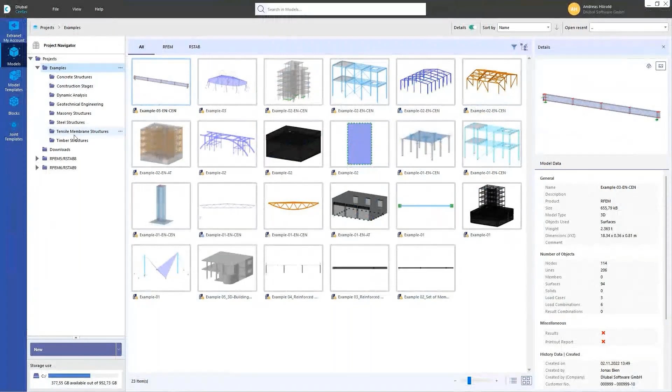That example you can find in the Dlubal Center under examples, then steel structures, and that's the example. I prepared that, I selected also the steel design. Okay, so let's do a steel design.

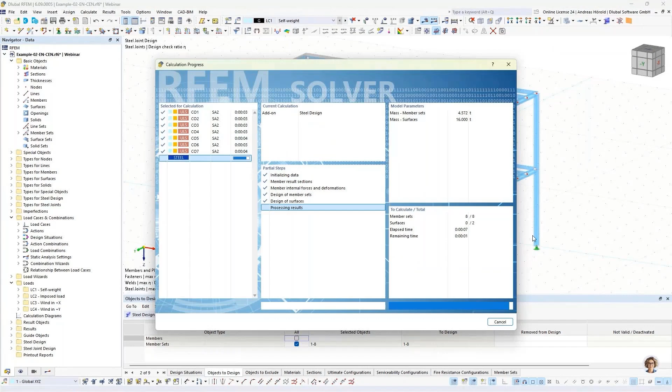I select only the member sets. The member sets are all columns. Let's calculate all. I have to mention that I don't edit imperfections, I don't edit buckling lengths and so on, that's why we don't do any stability design here.

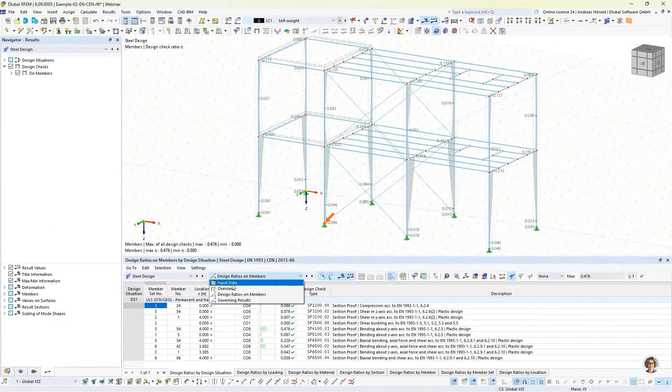It's only an example, so I switch to the wireframe model, and you can see we see all the results for the member sets. So when we want to design also the members, I select the members, then all results are deleted.

So now I show you the other way. I calculate the member sets again. And if you don't want to delete the existing results, go to the navigator data, left at the bottom, and then right-click on steel design and press settings.

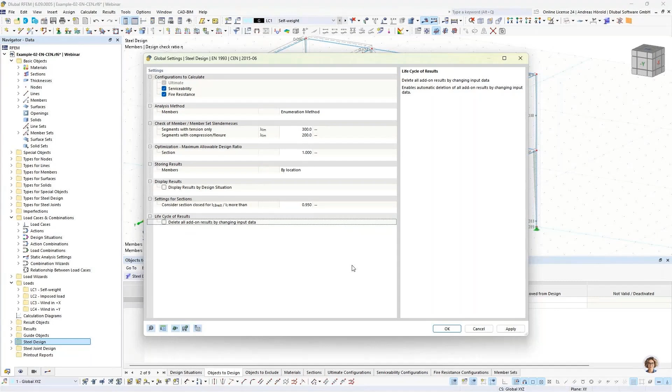The other way is to go to the table steel design, input data, and then you can press that button. That's a different way. You can deselect that button, delete all add-on results by changing input data, and if you uncheck that, the results aren't deleted. So now we select also the members, the results aren't deleted, and I can recalculate all. Now we have results for all.

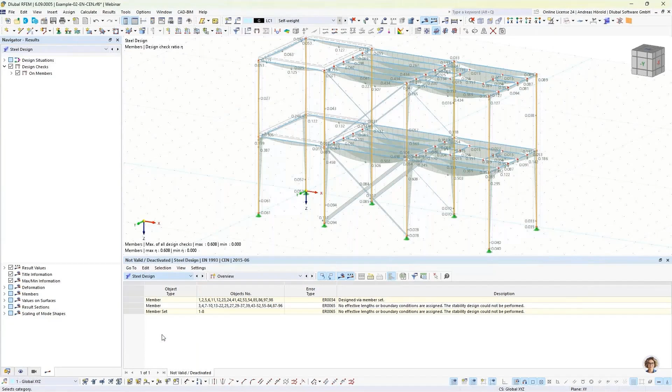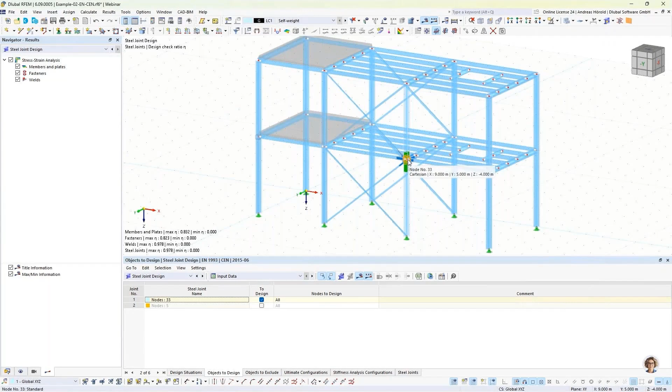It shouldn't be necessary for that simple calculation, but if you have more complex models or more load combinations and so on, then you can do that, or if you have activated the add-on steel joint design. In this example, only one of two nodes is designed, only this node. I can show that. So this connection or joint is already calculated, but not this one.

And if I deselect that also, okay, then I can press that button for designing node 5, and the results aren't deleted. It's only an error, not calculated yet, but the results of this node, node 33, aren't deleted.

Okay, then we turn to the next question. I want to edit a multi-print afterwards, how do I do that? I prepared this example. At first, I don't show the results.

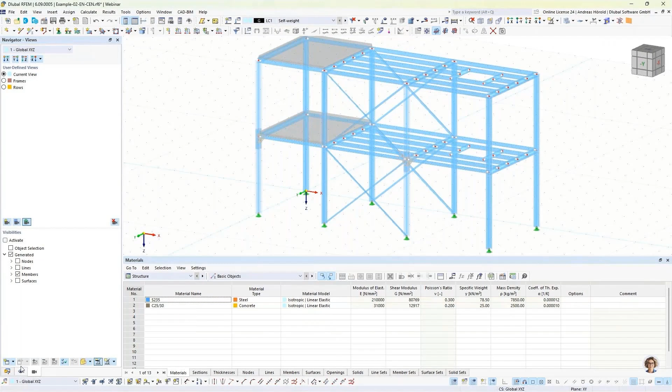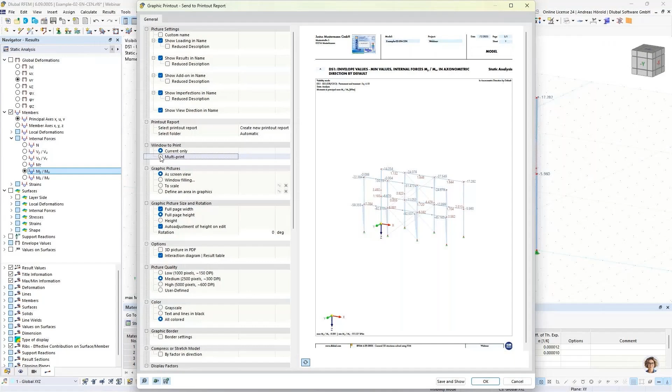Print graphics to printout report. Then I select multi-print and window filling. So then we have to select what we want in the multi-print: no views, no loads, but results.

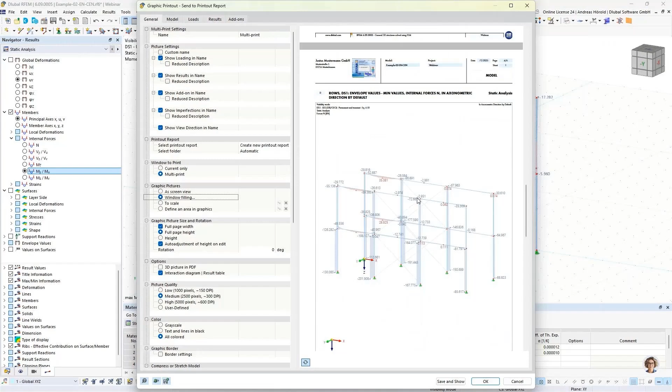For the frames and the rows, user-defined views, then members, internal forces, for example N, VZ, and MY. 9 graphics, not the current view, 6 graphics. You can see that in the print preview. So those are the frames and the rows. Okay, I press save and show that we printed it in the printout report.

I don't print the steel design results and the steel joint design results. Okay.

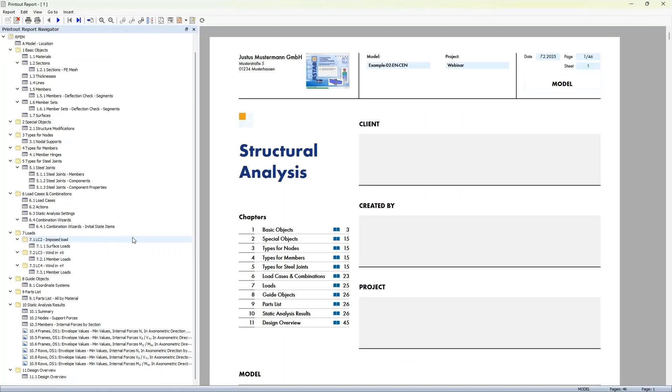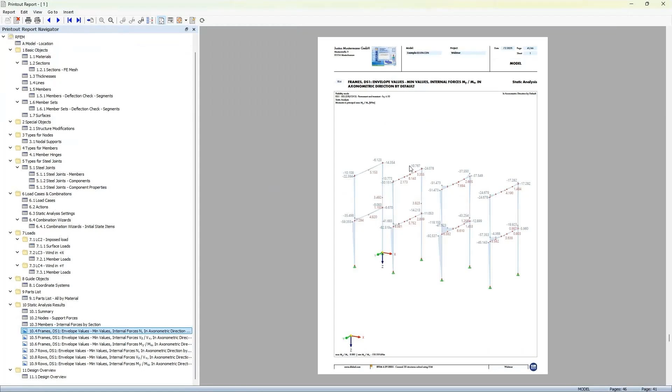So now we can see the different graphics. I can change the view, fit page. So those are the 6 graphics, and we want to edit these multi-print.

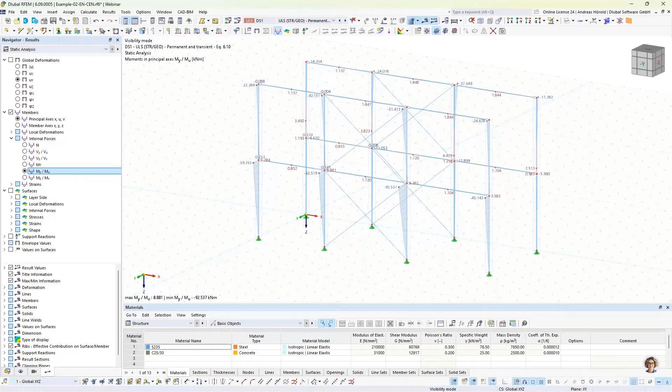So how to do that? That button, edit multi-print, I select it. Okay, so now we can change the settings.

For example, for results, we want to add the other internal forces. So now we have got 12 images, and we can go to or turn to image actions.

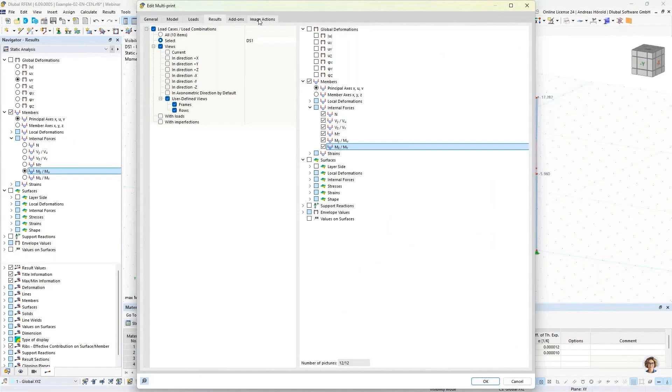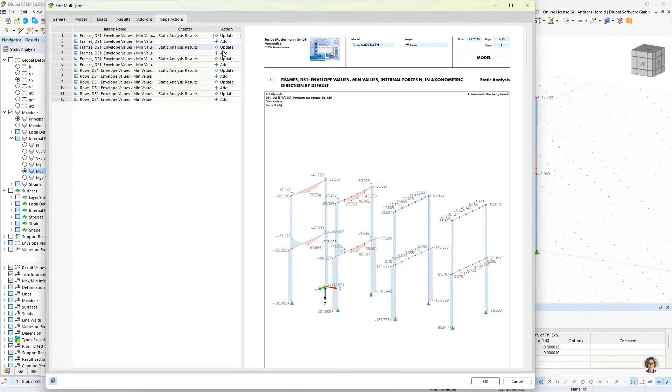And we can increase the window. We can say update or no action, add for the new graphics, or what you want. You can also change the graphic, for example the color to grayscale, then all images should be in gray. Update add, we'll leave that. Press OK.

Yeah, the graphics are updated now, all in gray, and we have got all the 12 graphics. Okay, that should be all to that question.

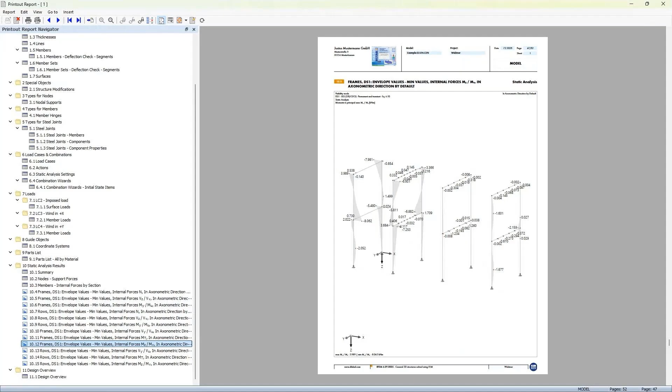The next question is, why do I get a different section moduli in RSECTION than in SHAPE-THIN? Let's turn back to the PowerPoint. The reason for that is the determination of the section moduli, which is different in SHAPE-THIN and in RSECTION.

For example, in SHAPE-THIN and SHAPE-MASSIVE, the section moduli is determined by a simple formula: the section moduli equals the area moment of inertia divided by the edge distances. In RSECTION, there's a more complex, more detailed formula. It's more exact, and it's an improvement in RSECTION. So you will get different results.

And what is important is, with the section moduli calculated this way in SHAPE-THIN, it's not possible to directly calculate the maximum and minimum normal stress from the bending moments for asymmetric cross sections. For symmetric cross sections, you will get the same results in both. In RSECTION, the section moduli are determined such that they allow the direct calculation of the extreme normal stresses from the bending moments. That's the difference, that's a short overview.

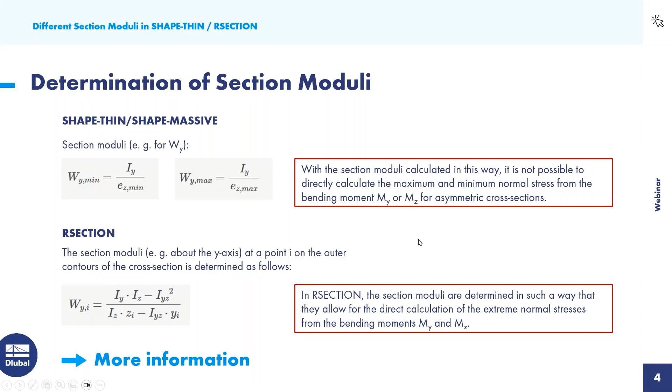515.9, and Iz is 94.46 for both. But the section moduli is different. So for example, WY max 75, and here, 37.18. The section moduli are different, and the reason is as I described it in the PowerPoint.

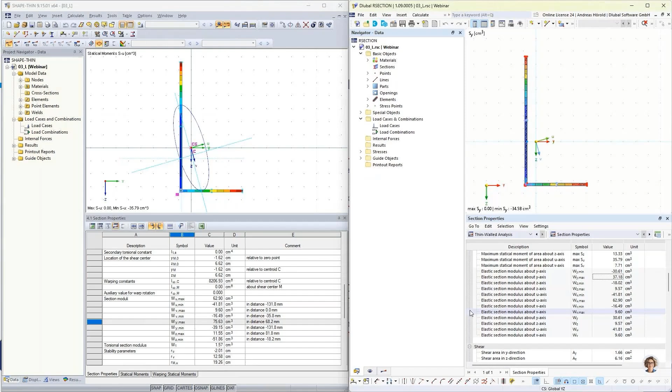Thank you, Andreas, for handing over. I will continue with the next topic. So the next question is, can the longitudinal reinforcement of members be determined automatically?

So I've created a model for you. This is a reinforced concrete building with members forming a frame, having 3 frames in a row and 2 stories, and load transfer surfaces which hand over the imposed load, snow loads, and wind loads on our building. So we already have static analysis results.

And what we now want to show is how you can define reinforcements and let them be calculated automatically for you. We show it in two member representatives: number 2 are the outside members, and representative number 3 are the inside members. If you double click on the member representative, you can assign longitudinal reinforcement for all the members behind it.

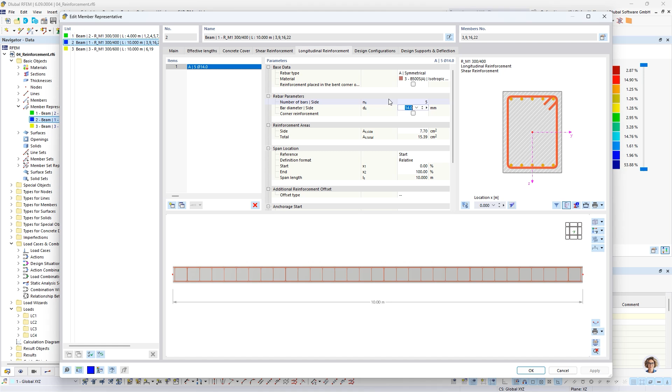Usually you can define the number of bars and the diameter, but the program can also automatically determine this for you, not both simultaneously, but either the number of bars or the diameters. For representative number 2, we want to automatically design the diameter, so we want to put in 5 members in the range of 10 up to 20 millimeters in size. Whenever it reaches the maximum, it stops, of course, to input more members or thicker diameter.

So you should see in the results that then the design is not fulfilled. You can later on adjust these boundaries in order to let the program fully determine the amount of members. So you see what you can enter here.

And for representative number 3, we want to adjust the numbers. So we hit auto, and then we can also determine, with a diameter of 20 millimeters in our example, a maximum amount. I know that 4 are not sufficient, so we will try to put in 4 and see what the program will offer us.

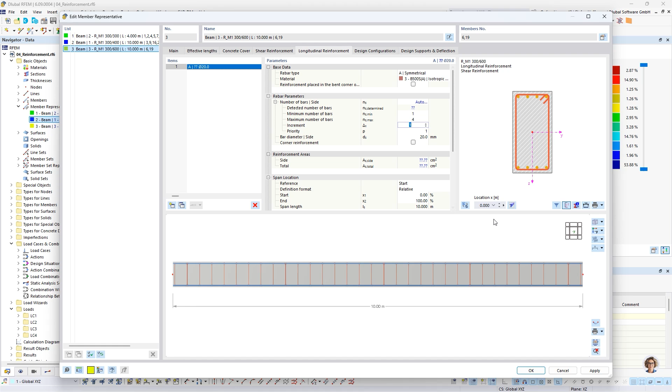We go into the concrete design where we now only want to get results of both representatives. So now we hit calculate. Due to the fact that we already have static analysis results, it quickly jumps into the concrete design, doing the workflow for you. It's calculating the amount and the diameters depending on what ranges we input.

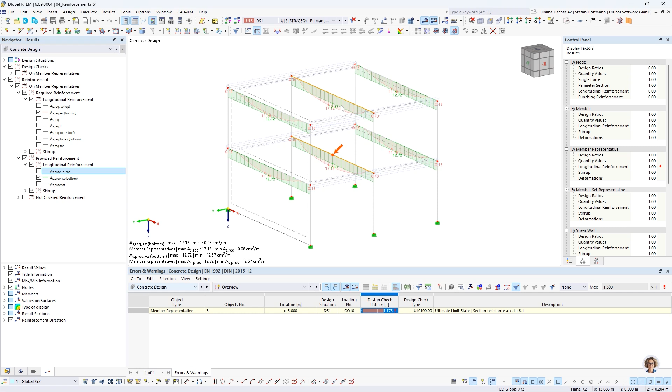Once we receive results, we can see that one check is not fulfilled. This may indicate that there isn't sufficient reinforcement put inside. We can quickly determine, for example, the bottom reinforcement for our representative is 17 in the middle, but what the program provided us, if you only check for bottom, is 12.57 in the middle. So you may be wondering why it's not enough. You can also check this in the not-covered reinforcement if you want to see the gap.

We can now see that there is only a gap here. If you remember, going into representative number 3, I said we want to achieve this result by putting maximum 4 diameter 20 inside, which gives us 12.57. So this is, of course, not enough.

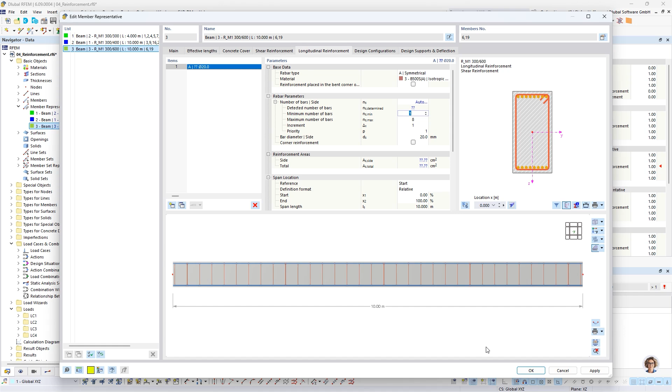In order to let the program run at full capacity, we now allow a maximum of 8 bars in this member representative. So there is no boundary forcing the program to stop; it can now determine and fulfill the design process.

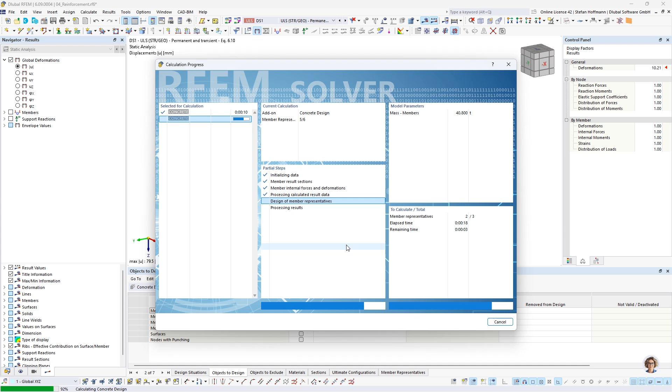Whenever you get results, we see that in the table there is no limit anymore. There is a maximum, but this is only due to construction reasons. If you compare once again, it does not change much: we need 1712, and we now provide 1885 in this area. This means there is no uncovered reinforcement for our model. This shows how you can quickly and automatically let the program determine the required reinforcement for your members.

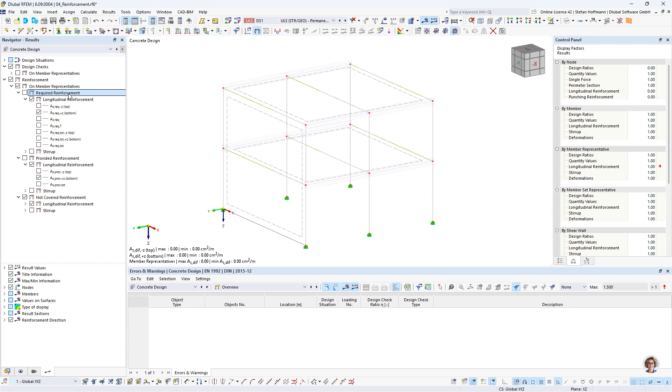We will go to the next model, our block foundation. So the question is, can I design a block foundation in RFEM 6? And yes, it's possible.

Quickly about the model: we have just a single column which is fixed at the bottom with some loads on it. In order to define a block foundation, you have to assign it in a nodal support. You simply check that it's a foundation, and then there's a next tab where you can choose what foundation you would like to use.

It's object oriented, as RFEM 6 offers you, to define one object of a block foundation for multiple columns. You just need to assign this object, and you do not need to type in multiple inputs just for multiple similar objects.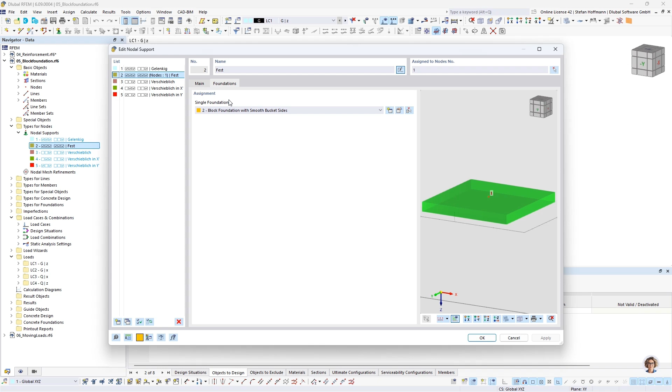Once you define this, it is also shown graphically, and if you double click on it, you directly jump into the single foundation. You can see that there are several types, and we want to take care of the block foundation with smooth bucket sides.

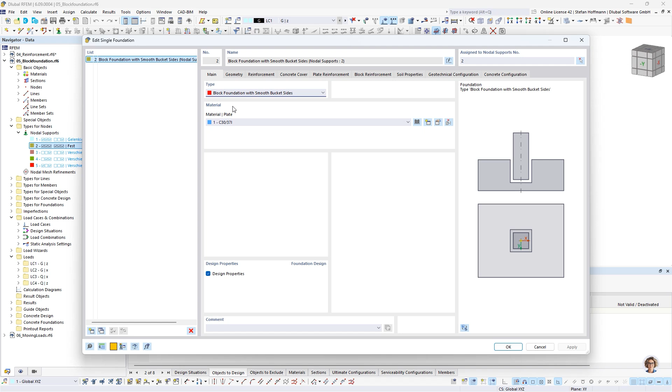First you need to start with a material of the plate, which you define, and then you can step into the geometry, where you can also define it by checking the sketch, or simply switch into the full view, where you can use the view cube to rotate your model to see if it fits for your column and your purpose.

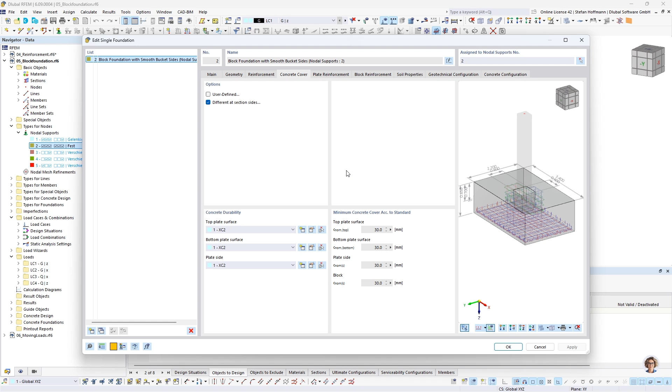Then you step into the next reinforcement definition, where you choose the material and the types. Then you switch into the cover, so you can define different durabilities for different places. The next definition would be the plate reinforcement, the bottom and top ones, where you can enter the data you would like.

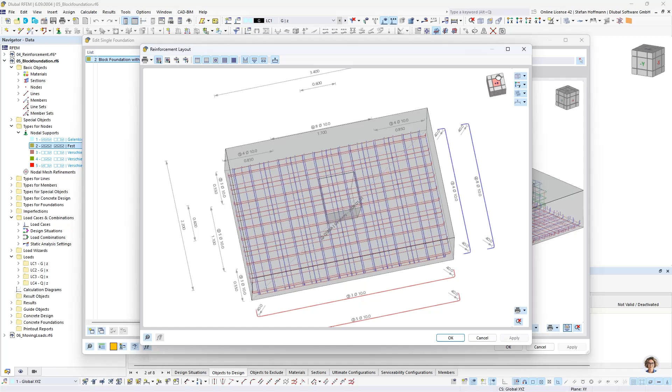You can also directly see the representation of the concrete reinforcement in the graphics. You can jump with this shortcut into the reinforcement layout, where you also have the view cube, and you are able to switch on and off certain reinforcement types and also print it into the protocol.

The next one is the block reinforcement. For the bucket sides, you can also define stirrups, which is most likely necessary depending on whether you have a lot of horizontal loads.

The next one would be soil properties. We also would like to do a geotechnical analysis in our model. You can define user-defined soil parameters, or most likely, with the geotechnical add-on, a soil massif, in order to gain all the soil properties we need.

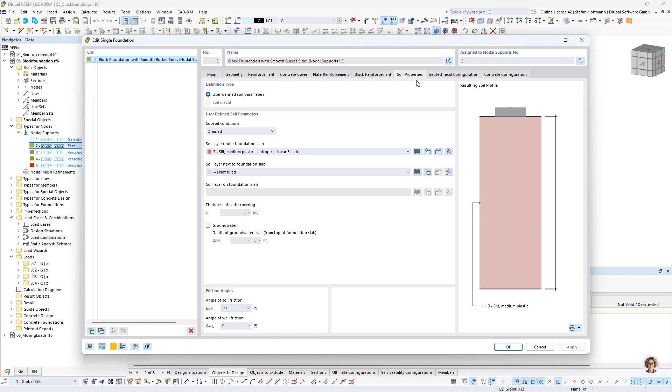The last two steps would be to check or assign geotechnical design configurations, where you can choose what you would like to inspect, either all of them or just some designs only. Last but not least, the concrete configuration, where you are able to adjust the current set parameters.

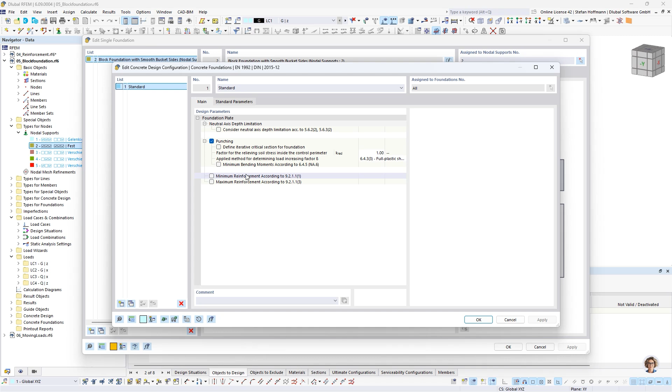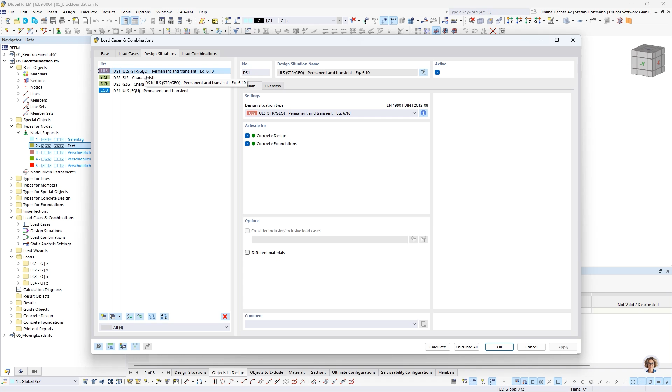So we defined all the properties. Let's step quickly once again into the loads. We defined multiple design situations: the normal ultimate limit design with structural and geo collapse, the other SLS situations, and also a ULS equilibrium permanent and transient design situation, which we will only take care of in our concrete foundations.

Jumping into the concrete foundations, you see that we have assigned the design set types, and if we hit calculate, it will run first of all the static analysis, because we do not have results yet in this file. It does not take long - you can see 6 cores are used on my computer, 3 seconds. And then we will directly jump into the results.

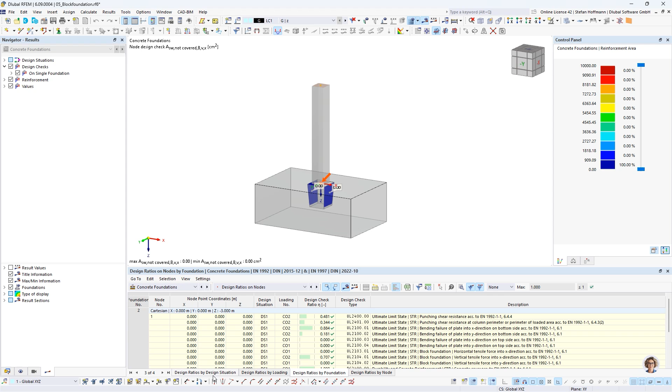So you have, as you are maybe used to, also table results, where you can switch between representation of different information. You can also use the navigator in order to check for all the required or provided reinforcement, which is split as shown in the first part, also for the plate, bottom and top, and also for the block reinforcement, what might be required in order to fulfill the force distribution into the foundation.

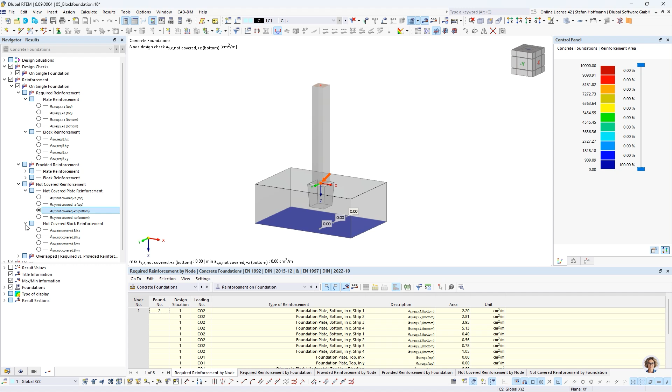And of course, you can once again also see the not covered reinforcement by checking the values. So as you can see, we are lacking some reinforcement in the bucket sides.

So we are coming to my last example, and the question is: how can I create moving loads in RFEM 6? In this example, I use the model from our knowledge base article 1908. We have a load we would like to define: 2 single loads, 1.5 meter spacing, vertically and horizontally in both directions. And we have an axle load of 240 kilonewton per square meter with a size given here. It should go across the bridge.

In order to have the loadings defined, we first of all need to have a line, which then needs to be a line set. The line set will be used in order to define the load direction. And it's no extra add-on you need - it's already included in the main program.

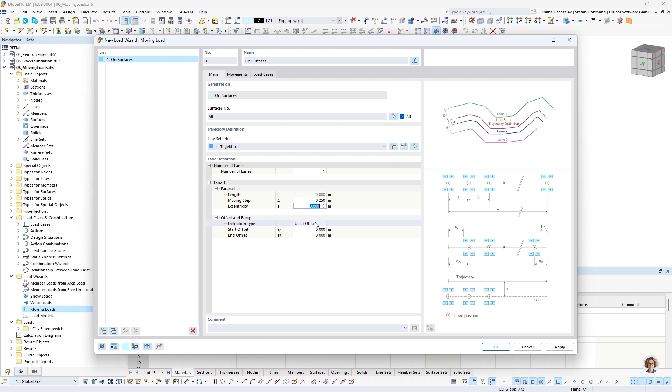So it's a load wizard where you define a new load wizard with the moving loads. You first go from top to bottom, left to right, and you have to define what surfaces you would like to use. In our example, we can hit all because only our street is used with surfaces. And since we only have one line set, it's already assigned over here. We want to have the moving step at 1/4 meter, and the rest we can use as it is given, only one lane.

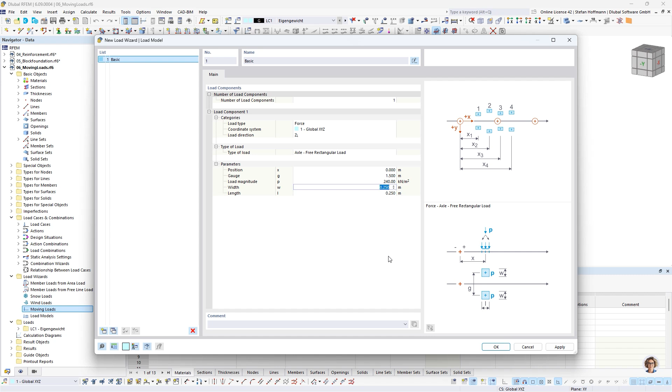The next thing would be that we have to assign our lane definition with our load model. You can click here, since we did not yet define a load model. We want to use one load component with a force, load direction ZL. We want to use the axle-free rectangular load, and we will start at 0, have a gauge of 1.5, 240 as the value, and then the width and the length at 1/4 meter. If we hit OK, the lane and the load model are together, and we only need to hit OK.

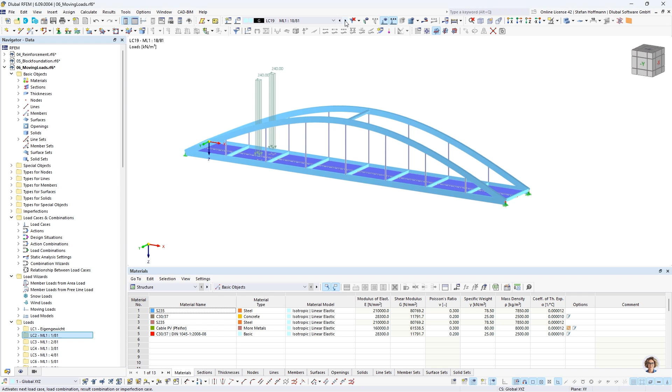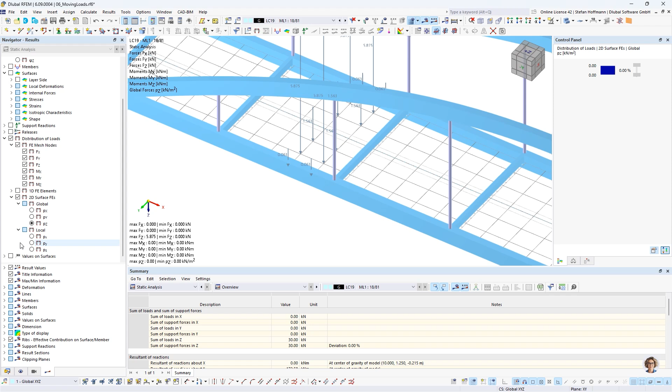So you can see that loads will be created, 81 load steps, and you can then see how the load is moving along your bridge by checking these steps. You can also run a calculation for one certain load case, or use it in a result combination to get an overview of your results. Another good step is the distribution of loads, where you can check how the loads will be transferred, most likely as PZ values, or sometimes as split nodal loads, depending on how you use the definition.

All right, so I come to an end. Thanks for your attendance, and I hand over back to Andreas.